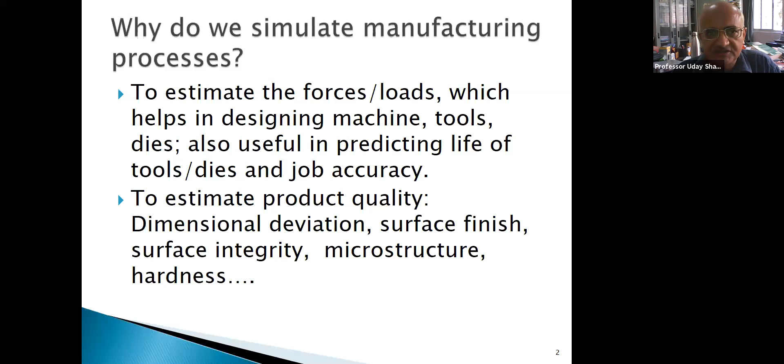Now, this is a common question people ask sometimes, maybe in many interviews also: what is the difference between simulation and modeling? So the definition of simulation, let us see what we actually mean by simulation. If we see the dictionary meaning, simulation is an approximate imitation of the process.

Here, this definition is not talking about whether it is a computer simulation. It may be by some machine also, like sometimes we simulate the actual experiments. If we want to simulate the situation of a flood, but we arrange that in a confined room, in a scale model, that is also simulation.

Another definition is that simulation is the imitative representation of the functioning of one system or process by means of the functioning of another. So if I am making, suppose there is a forging machine, and I take all its data and put it into the computer—naturally it was designed there—I can put all the things, and then whatever is happening on the actual machine, I can simulate on its digital avatar. That is also basically imitation.

That means one thing is being done in the computer, another thing is being done on the shop floor. And simulation, modeling, and analysis is the process of creating and experimenting with a computerized mathematical model of a physical system. So it is this definition which we will be following in this talk today—that invariably there will be a computer involved.

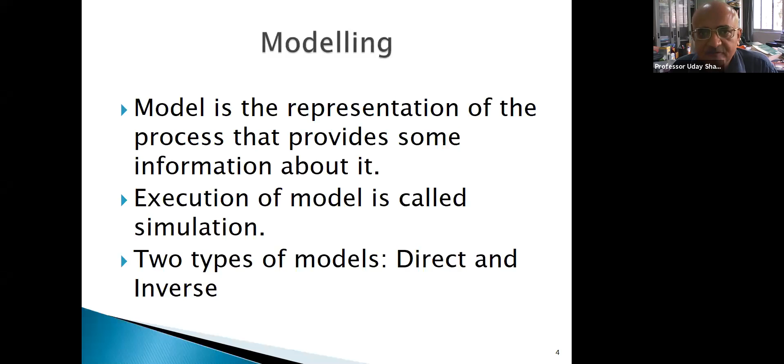Now let us start, since we are talking about modeling of manufacturing processes. What are the various types of processes? We have machining, which comes under the area of subtractive processes. Here we subtract the material.

Then metal forming, which is mass containing - neither we remove the material nor do we add it. Similarly, casting can also be called a mass-containing process. Here, in both these processes, we change something from one phase to another. In casting we change the solid thing to liquid and then we make the part; in metal forming we do not change it to liquid, but we make it into plastic form.

And then after that, powder metallurgy, then joining, welding, adhesive bonding, then 3D printing, which means additive process. So all these processes are there.

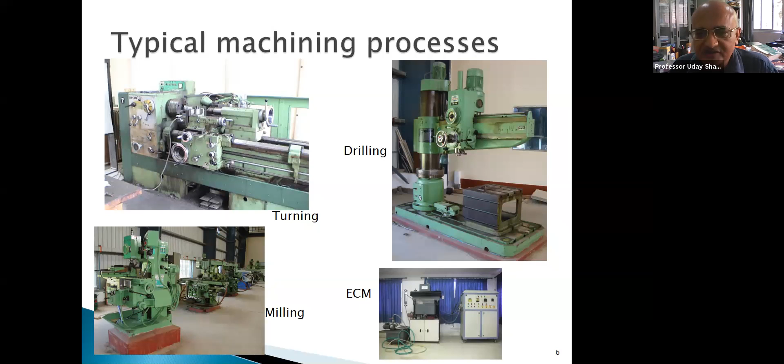Typical machining processes - you have many, like turning, which we do in our workshop. We have drilling, milling, electrochemical machining. Now electrochemical machining is covered in many books as a non-traditional process, but it has naturally become like a traditional manufacturing process - electrochemical machining, electro-discharge machining.

Typical metal forming processes: metal forming processes are those processes which cause a change in the shape of solid metal parts via plastic, permanent deformation. We divide it into two parts basically - bulk metal forming processes and sheet metal forming processes.

Of course we also have combinations, which are nowadays called bulk-sheet metal forming processes. In bulk metal forming processes, raw material and products have a relatively high ratio of volume to surface area. For example, rolling - surface area is somewhat less, but the volume is more.

Rolling was developed somehow in something like the 14th century, and was used on a commercial scale. And if we talk about extrusion, extrusion was developed by Joseph Bramah in 1797.

They were making lead pipes in those days. Now you know that we should not make lead pipes, because lead is a very harmful substance for human health, so lead pipes should be extinct. Still, in some places lead pipes may be there, but in earlier days even water supply was through lead pipes.

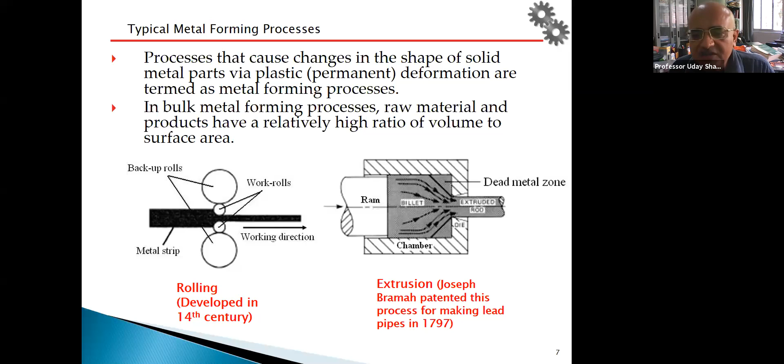So extrusion was used, and nowadays we can in fact extrude very high temperature materials also. Then forging - you have open die forging where it is upsetting, and then we have precision forging, closed die forging.

Forging was in fact in use even 10,000 years ago. In closed die forging, you compress it and it will be totally confined - material will be confined in the die, and some part of it will come out, which is called flash. It has to be trimmed. But nowadays, in precision forging, because of proper modeling, that flash can be minimized or almost eliminated.

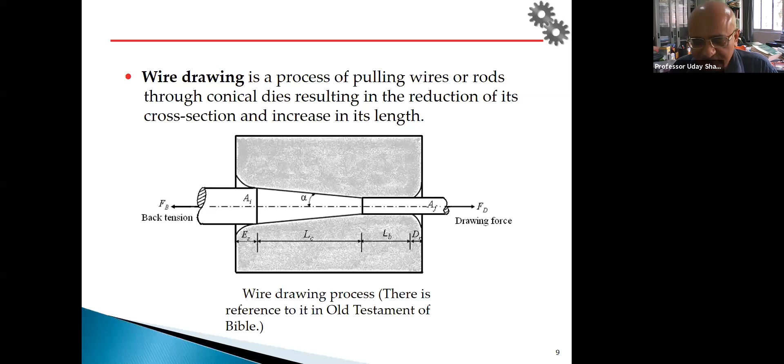Then you have wire drawing - it is just the pulling of wire or rod through conical dies, or any type of die, the profile of which may be of different type. In fact, there is reference to wire drawing even in the Old Testament of the Bible, so that means it is a very old process.

In sheet metal forming processes, raw materials and products have a relatively low ratio of volume to surface area. So here our primary purpose is not to change the thickness of the sheet, although the thickness of the sheet will also get automatically changed.

All these things will affect the quality of the product. If you apply very low amount of blank holder force, you may get wrinkling, and if you apply too much force, you will get tearing. So you can eliminate a lot of hit and trial experiments if you do proper modeling of this thing.

The raw material property also has effect. If the sheet has a lot of planar anisotropy, if the properties are different in different directions in a plane, you get one defect called earing. It's like a human ear you get on the sheet at the edges. These type of defects can be eliminated.

Now these are the traditional metal forming processes, but there are now emerging somewhat non-traditional metal forming processes also. Here in IIT Guwahati we have done such experiments, where we are deforming the material only by heating through a laser.

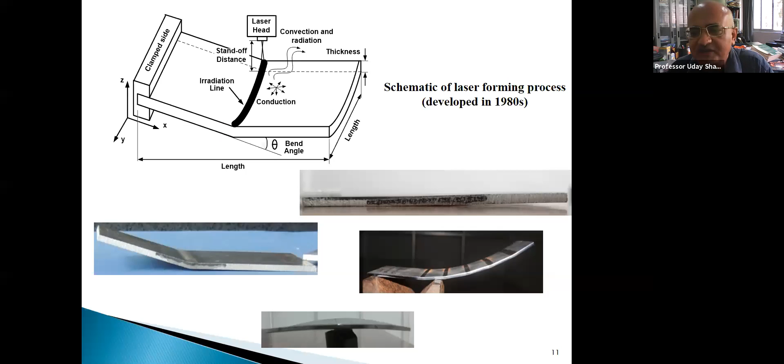And then I am making different types of shapes. I can make a cup, and this was just by heating - there is no contact at all. You can do that forming during, or after, the assembly also. In any inaccessible area, you cannot take your whole machine and die and punch, but you can take your laser torch only there, and it can be done.

So then we tried laser assisted bending. Assisted means that the primary process is not done by the laser. The laser is only heating and changing the properties locally, and bending is done mechanically here.

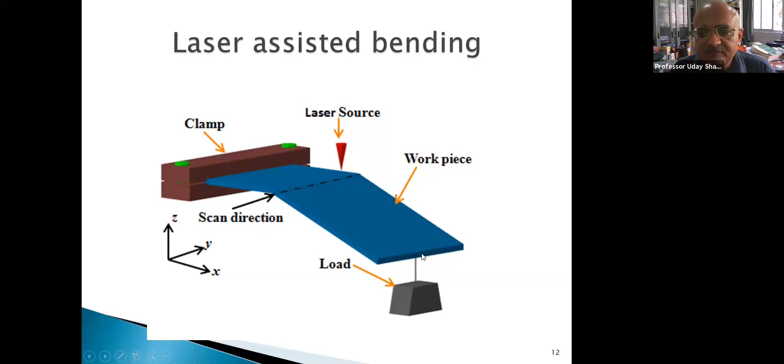Then there is laser origami. Origami is basically a Japanese word, meaning the art of paper folding - they make various things by paper. Laser origami means that if there is a sheet, I can make it into different forms, suitable for use, and then finally there is no need to cut and machine, and we can make complicated structures.

Apart from this, nowadays there is a trend that traditionally we have been thinking that metal forming is the process which will change raw material into a product form by means of plastic deformation. But another application of metal forming can be to improve the properties of the metal material.

Here I will not be changing the shape, just changing - suppose I will refine my grain structure. My grains will become ultra fine, even less than 1 micron in size, and due to that the properties will increase. Maybe its yield strength may increase by even 2 times, 3 times.

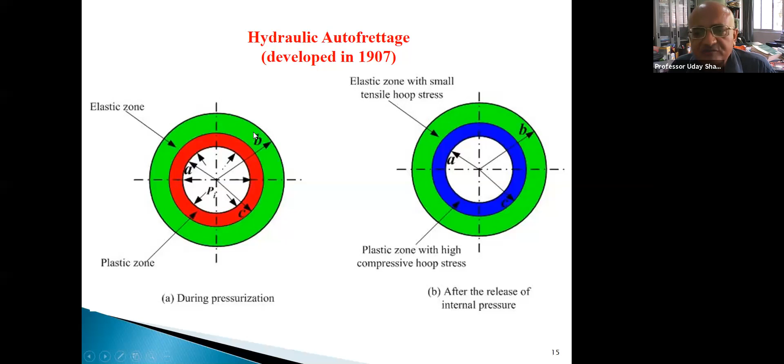So what happens is that hydraulic autofrettage produces compressive residual stresses inside, and outside we have got maybe some small amount of tensile residual stresses. So this type of process is also done.

We developed here, around 2014, extensive experiments on thermal autofrettage. Basically in thermal autofrettage, we are producing the same residual stresses by thermal means. This point has to be remembered: here the strengthening process is not due to strain hardening, but mainly due to residual stresses.

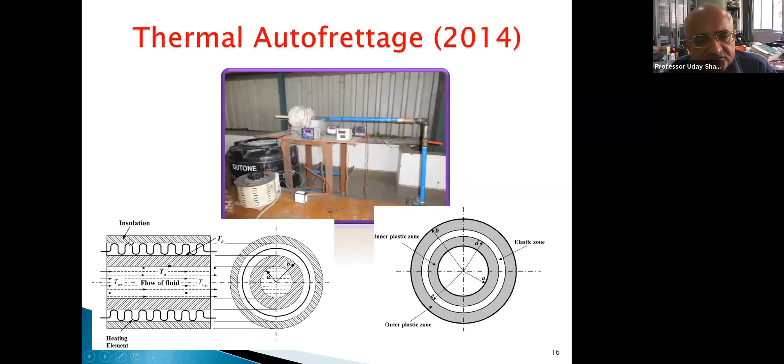Like we have even shot peening, where we inject a lot of balls on the surface just to induce compressive residual stresses. So what I am doing here is flowing water through the thick cylinder, and outside I am heating it, and then I am getting the residual stresses.

Recently I was telling my PhD student he should do some rotational autofrettage, but he could not do it in time, and after 2 years I saw this was done by someone, I think in UK — he did something about rotational autofrettage, where due to rotation of the cylinder we are producing the residual stresses. So these are the different types of processes.

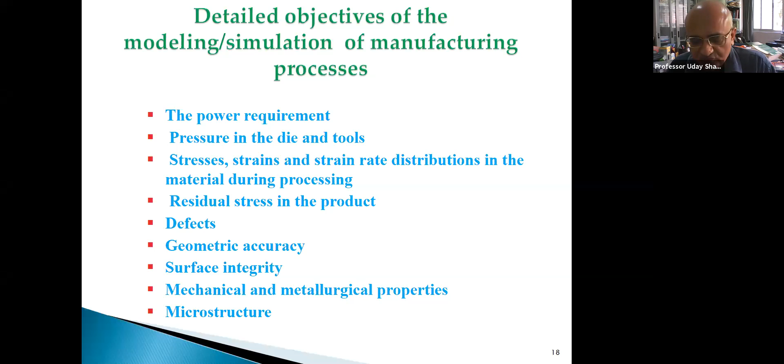So thermomechanical and microstructural modeling has to be done together. Now briefly I summarize these traditional techniques, because when we talk about modeling and simulation, suppose you want to make a good simulation package which can do these things — maybe it can be used for actual designing on the shop floor, or maybe as an educational package.

The idea is that it is not always necessary to use the finite element method. There are various methods which are very fast in predicting results, and in some cases, with some relaxation of assumptions, you can get accuracy as much as in the finite element method. Then why not use those methods, because they also give the physical feel, and they are computationally very fast. So we should not throw away those methods, although most of the time nowadays we are not using them.

One method is very old, called the SLAB method. It was used extensively in the 1920s, and after that it is contained in the traditional books. All the books on manufacturing science will contain these methods. For example, we take a slab of the material, do a force balance, develop equations, and solve them.

But this has been used even in recent times, like asymmetric rolling has been modeled using the SLAB method. Asymmetric rolling is an emerging process used not only for producing curved sheets and reducing load, but also for improving the microstructure.

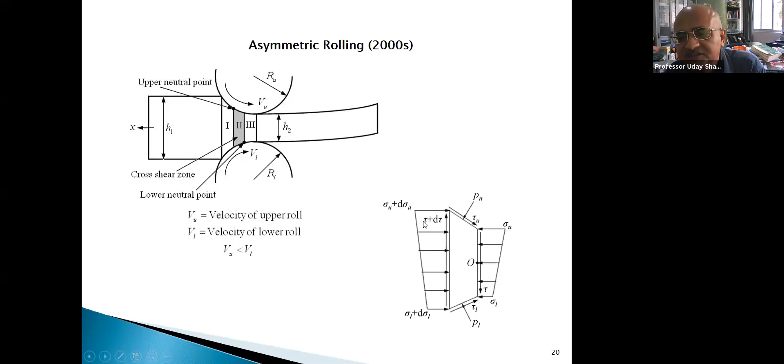So I assume that the stress distribution is linear here, like that. When you model this, you do force and moment balance, and you get three equations: sigma Fx equal to 0, Fy equal to 0, and sigma M0 equal to 0. These three differential equations can be solved simultaneously using any method for coupled ODEs - ordinary differential equations. You can even use the Runge-Kutta method, among many others.

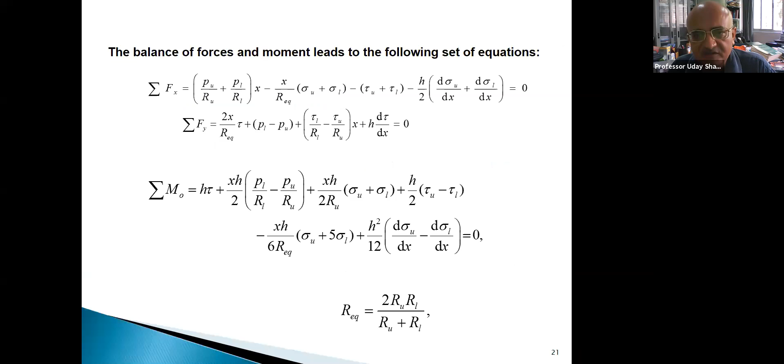So this type of thing is called the SLAB method, which is still being used. Another method was very popular once upon a time, called the slip line method, because it relied a lot on physical intuition. In most ductile materials, it is believed that deformation takes place due to slippage.

Even dislocations are there, but dislocations slip. So we assume that wherever there is maximum shear stress along a direction, there is slippage. But this method is usually applicable for plane strain problems, although researchers have tried to use it for axisymmetric problems too, with some assumptions and limitations.

In essence, the slip line method is basically solving these types of equations. You have to satisfy some yield criteria, although numerically, with the help of computers, it is also possible to take strain hardening into account. But most traditional slip line solutions are for rigid plastic material - they don't assume any strain hardening. So we can use either the Tresca criteria or the von Mises criteria, and we have to write the equilibrium equations.

It is essential that in most metal forming processes, if we achieve deformation through mechanical loading, we must always satisfy these equations. They are basically Newton's or Euler's laws of motion. I am not talking about the inertia term here, so you won't see it, but we do the force balance and get the equilibrium equations.

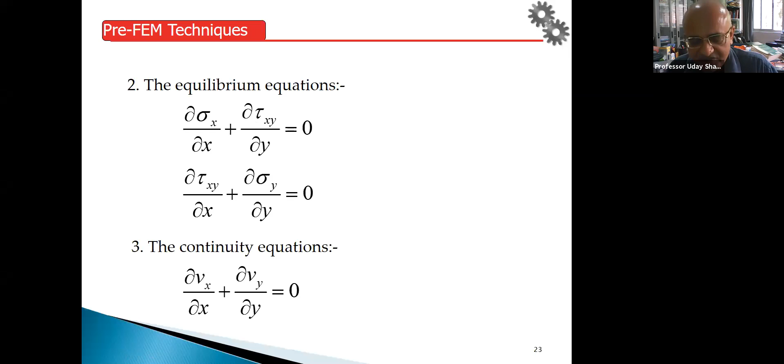Then continuity equations - since it is basically a mass conservation, and I assume the volume is also not changing, I get the continuity equation. When we use the slip line solution, we also assume that the principal directions for stress and strain rate will be the same - wherever there is a maximum principal stress, in the same direction there will be maximum principal strain, because most materials follow this procedure. But this may fail in newer types of materials, so you have to be alert about that.

So naturally we have got 5 equations and we have got 5 unknowns: sigma x, sigma y, tau x y, and Vx, Vy, velocity components. This one can be done analytically, but slip line is invariably a graphical type of method.

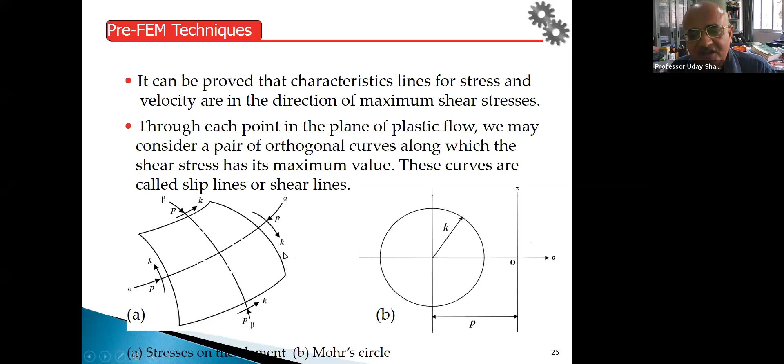Same thing we are solving by means of the slip line, and we say this is one slip line, alpha line, other is beta line, and on each plane on the slip line there is a pressure acting, and there is a shear stress, that is K. That K is the yield stress of the material. We can draw the Mohr circle and we can do that.

Then the equations we use are all based on equilibrium equations. We have some equations, that is Hencky's equation: P plus 2K phi is equal to constant along the alpha line, P minus 2K phi is constant along the beta line. That means if the slip line is turning, then the pressure will be changing, and similarly we can find out the velocity.

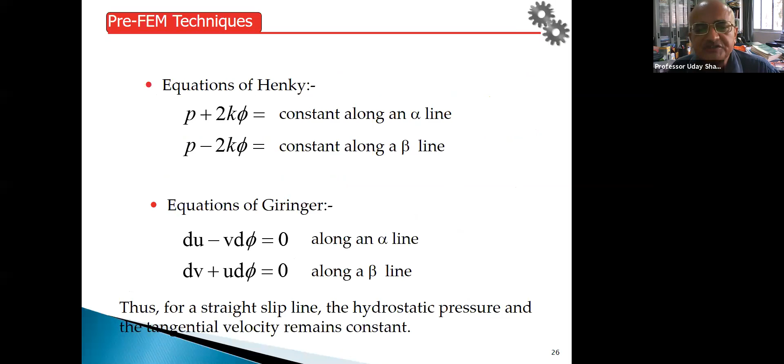So typically, say for example, you are doing the punch problem, you can construct the slip line. Now the slip lines can be constructed in a heuristic way, or they can be constructed in an analytical way.

Say for example, we can say that in this plane there is no vertical stress, so therefore this must be one principal plane, and therefore the shear stress should be at 45 degrees. Like these type of logics you can put, and you can actually construct the slip line field for the indentation of, suppose, a semi-infinite medium by a punch, and then you do the analysis and you can get that the punch load will be 2K times 1 plus pi by 2.

So then they have been used, in fact, in machining also. In machining they used, suppose this is a chip and this shearing is taking place, they assume that this is the plastic zone and this maximum shear is along this direction, so it must be a slip line. And 90 degrees to it will also be a slip line. So based on that, they obtain these type of expressions.

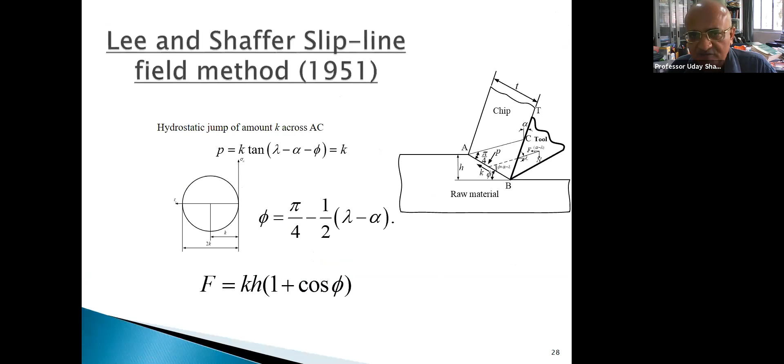This was done in something like the 50s and 60s. But even now, there are some papers. Say, for example, this is a good journal, International Journal of Mechanical Sciences. This paper has been published recently in 2017, Theoretical Prediction of Machining Induced Residual Stresses in Three-Dimensional Oblique Milling Processes.

In this work, stresses in the bound zone are evaluated using slip line field. So that means, although these techniques are very old, and nowadays in favor of FEM those techniques have become almost extinct, even then you can make use of that. So it is worth paying some attention to that.

Similarly, there is a technique which is extensively discussed in Hill's book in 1950. This is called the upper bound method. This gives a very quick estimate, and this can be a very handy practical method. This method calculates the greatest possible load that a metal forming process can deliver or sustain.

In this process, what happens is suppose you are doing metal forming, you assume a hypothetical velocity field, that your process can be going this way. It may not be the real flow, but based on that you find out the stresses, etc. And then you develop that, if there are some discontinuities, at that point you say that power is due to shear discontinuity, you consider the friction effect also. With all these you calculate the power, that means hypothetical power.

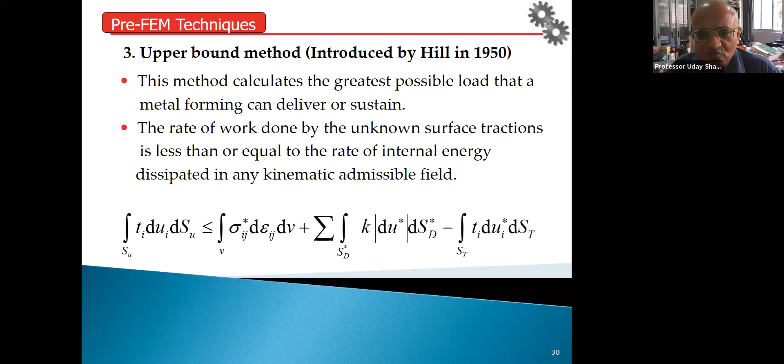So this hypothetical power which you have got, it will always be more than the actual power. Maybe the intuitive understanding will be like this, because most natural systems actually try to minimize power consumption. So that is why the upper bound method becomes very handy, that you just have to assume a suitable velocity field and you can do that.

Similar to the upper bound method, in fact, the lower bound method is also there. In this, you don't assume any velocity field, but you assume a type of stress field. So in this, what happens is that when the body is yielding and you consider that plastic deformation is taking place, based on the hypothetical stress field, you calculate the power, etc. Then what will happen is that this power will be less than the actual power.

So if you do both upper bound and lower bound analysis, you can get an estimate of that. But these techniques, of course, have many limitations, because here you are talking about only finding out the power, but you are interested in finding out many other things.

This can be used even for finding defects. The procedure is like that: they make one sound product and assume that this is the velocity field. Then they assume what the velocity field would be in a defective product. If the defective field gives less power, that means deformation is likely to take place that way and a defect will be formed. So these type of things have been done.

Long back, this procedure was also very much used, that is the visioplasticity method. Visioplasticity means visual examination. So we make a grid type of thing. Even now, when we do forming limit diagrams etc. on the sheet, we make some grids, and after that we see the deformation.

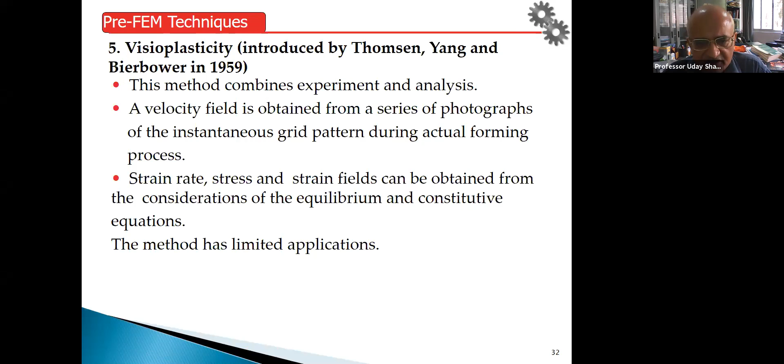During the deformation, we can keep some high-speed camera and take photographs. So I can see visually how the deformation is taking place, and then find out the strain rate, stresses and strain field, and then do the analysis. This method has, but nowadays, limited applications. With the advent of FEM, all these techniques have lost importance.

FEM was used for modeling of metal forming processes since about the 1970s. Typically, the finite element method is basically a numerical method of solving differential equations.

So basically, you have continuity equations in 3 dimensions, then equilibrium equations. I have used index notation. If you read new papers nowadays, they will invariably use index notation and even Einstein summation convention, but I am not going to detail about that. These are equilibrium equations, then strain rate velocity relations, strain displacement relations, and constitutive relations. All these things we do.

There are 2 approaches to do finite element analysis, 2 main approaches, and using different combinations of these 2, we have hybrid approaches also. One is the Lagrangian formulation, in which we focus on each and every particle as the deformation is taking place, how it is going. It is a type of control mass approach. The other approach is the Eulerian approach, also called flow formulation.

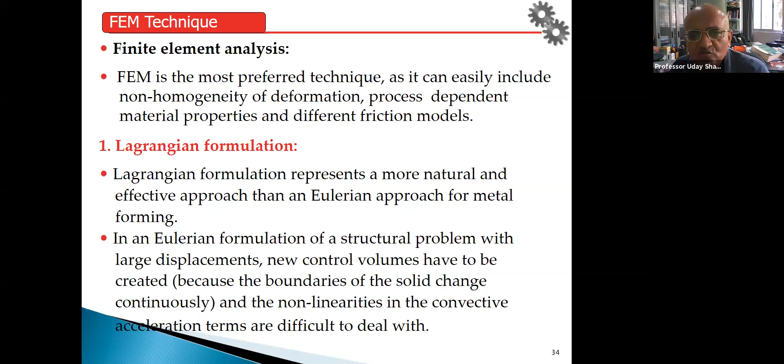It is something like water is flowing through a pipe and I am only seeing the pipe. So at any instant of time, there will be some particle, but after some time, another particle will come, and this process goes on. So these 2 formulations are used and they have got pros and cons.

In the updated Lagrangian formulation, at time t equal to 0, if a particular particle is at p, then it goes to p dash at t equal to tau, and after that it is going at tau plus delta t. So you have got a particle path, like that you have the particle path for all the particles, and the computer can keep tracking this.

In the finite element method, there may be some discrete particles, that means there may be some nodes, and the computer is basically tracking those nodes, and in between it will do interpolation. So these type of things are there.

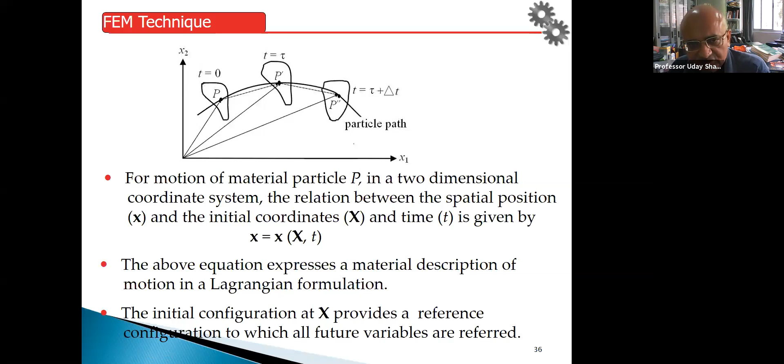Reference configuration is this. This is called total Lagrangian formulation, but you can also do it increment-wise, where when you are talking about this position, you only take the reference as the previous position. That will be called updated Lagrangian formulation. So in modern day finite element packages, these terms are used, updated Lagrangian formulation or Eulerian formulation. You should be familiar with that.

So updated Lagrangian formulation is that type of formulation. Suppose there is a car, now this car is going on the road, you follow where it is going. This auto is going in a different direction, you have to follow it also. And your truck is going a different way, like that, wherever they are going.

So your mesh will naturally keep distorting, because initially something was straight, after that its curvature has changed, it has become curved, so your mesh also has to change. All these type of difficulties are there. It takes a lot of computational time. That is the only drawback of this one.

In fact, I would tell you that our typical idea, when we did finite element simulation of laser bending etc., one simulation was taking about 7 to 8 hours. So you have to do something about it. Difficulties are more computational time, and sometimes residual stresses are not predicted properly due to accumulation of computational errors. You have to worry about that also. It is easier said than done.

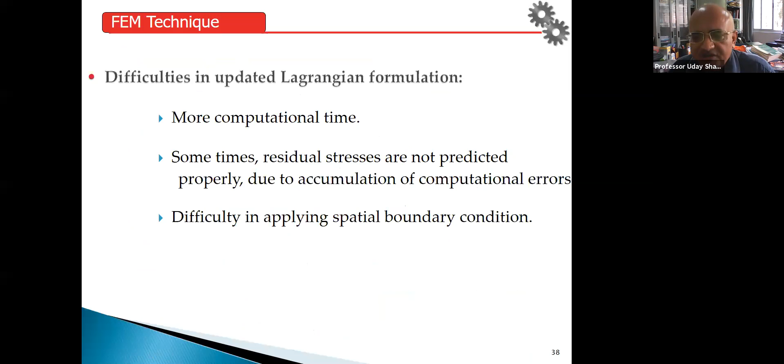A lot of difficulties are behind the screen, but finally you get a nice simulation. But difficulties are there, including difficulty in applying spatial boundary conditions.

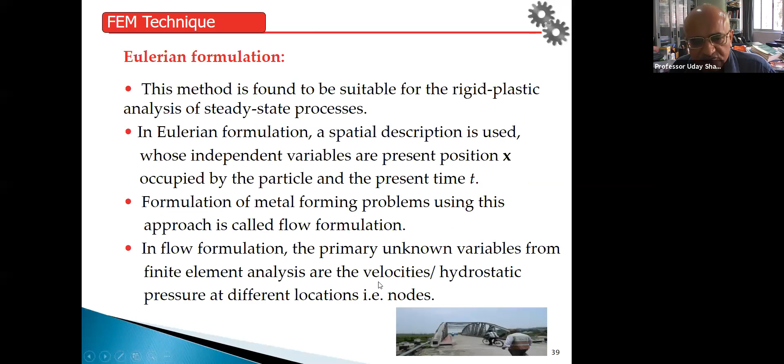Eulerian formulation is like this: suppose you have a bridge, you just stand on the bridge and see what is happening, who is passing through it. This type of formulation is also called flow formulation, and we find out velocities and hydrostatic stress.

So we talk in terms of the strain rate, and we have the Lévy-Mises plastic flow rule that relates the strain rate to deviatoric stress. And then we have a non-linear problem, like a flow problem, similar to solving the Navier-Stokes equation, but here it is non-linear, non-Newtonian flow.

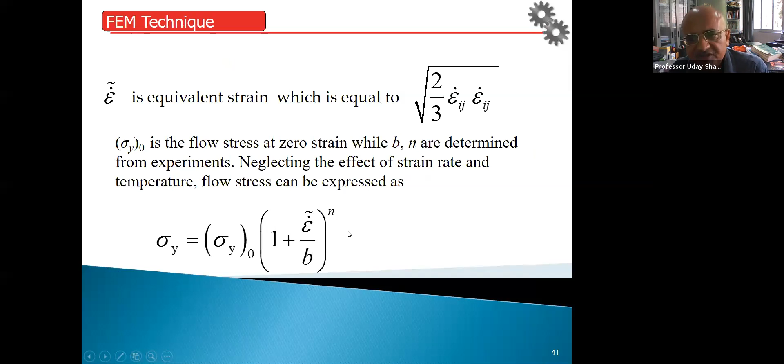Many researchers solve this using the Galerkin formulation, but sometimes there is some difficulty because in one equation there is a pressure term, and in the other equation there is not a pressure term.

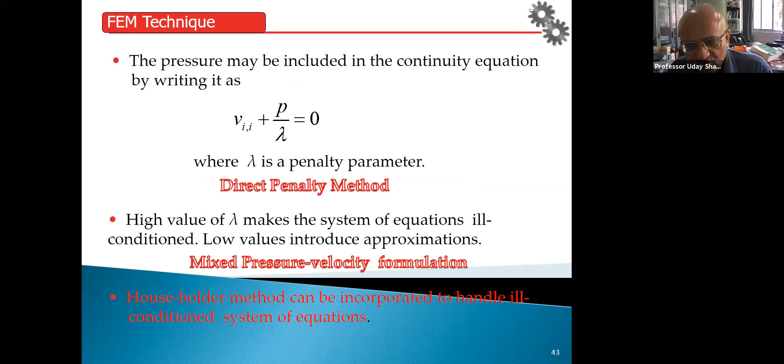So people use some penalty type of formulation. They say the continuity equation is this much plus P by lambda, hypothetically introducing a penalty, and lambda ideally should be infinity, but they take some finite value. Then there are mixed pressure-velocity formulations, but you get equations which are basically very ill-conditioned.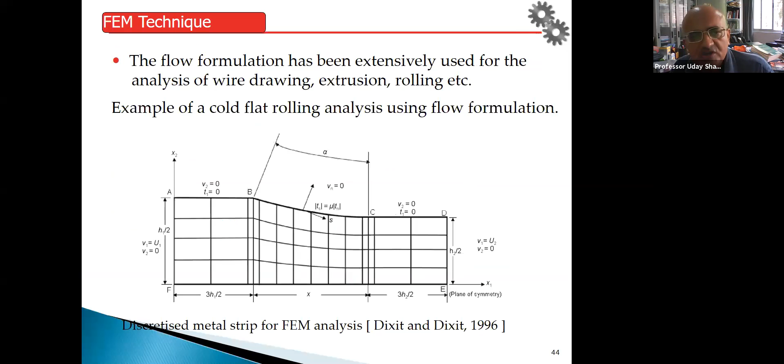So flow formulation has nevertheless been extensively used for wire drawing, extrusion, rolling, like a flat rolling problem. We have got the mesh, we are doing this, and then we get these type of equations.

Ultimately, at the end of the day, you only have to solve the simultaneous equations. So your accuracy is much dependent on how fast you can solve these simultaneous equations, meaning both accuracy and speed matter.

There are a lot of people who do research on what efficient method can be used for solving these simultaneous equations, because this matrix will contain a lot of zeros.

Sometimes you get a pressure, but we have noted that we get a spurious amount of pressure because there is no derivative of pressure involved in the equation. So you get some pressure times constant, and if epsilon dot ii is very, very small and this is very large, theoretically epsilon dot ii should be 0, lambda should be infinity, so infinity into 0 becomes indeterminate. So these types of problems are there.

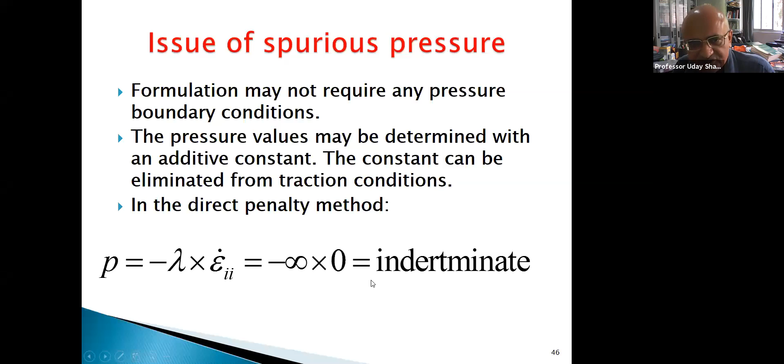So we computed pressure by some finite difference type of method, and after obtaining some solution, we again go back to solve the basic equations and try to reduce the error.

We also used a neural network here to ease our formulation problem, because once we have to take derivatives, if you take them by the finite element method, they will be very inaccurate. So you take this and then differentiate to get this one.

So what we did was, we saw that earlier we were getting results like this with the earlier model, shown as the dotted line, but now the results are coming very fine. That means they are matching well with the experiments.

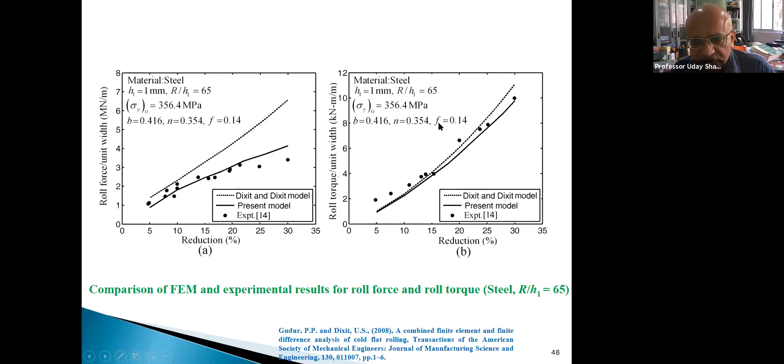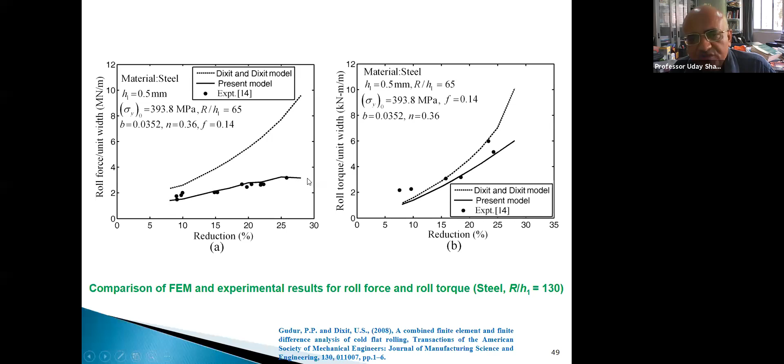Similarly, here the results for the roll torque are also shown, and there is a lot of improvement. Earlier you were getting results like this even by finite element, and other researchers were also getting similar results, but now we improved and are getting more accurate results.

The same improvement happens with other materials too. We have to test it on different materials because the properties will be different.

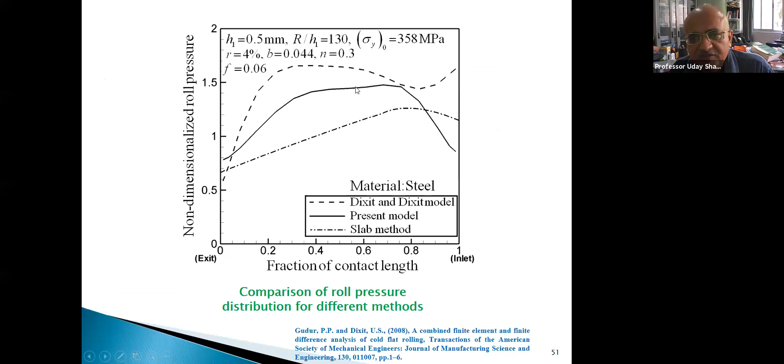We also tested the pressure distribution. If we find the pressure distribution by our original model and this model, and then by the slab method, we see that the results become somewhat different.

So some points regarding estimation of secondary quantities. The finite element method usually gives the nodal values, and after that you find the stresses and temperatures, etc. There are a lot of final issues which can affect the accuracy.

Suppose you have to find the load, let's say the forging load. You are doing the forging, you got the velocity field, you can find the strain rate, and after that you can find the stresses. Now if you integrate those stresses, you can find the force.

You integrate the stresses on the surface. The other way is that you can find out the total power dissipated, and then once the power is known, power divided by velocity, because the punch is giving all the power, it is compressing, all that upper die is coming and compressing the forging material, and it is coming like this.

So you can find out the forces by means of the integration of stresses, and also you can find out by energy balance. Now which approach will give good result?

It is noted that the energy balance approach will give correct result, because in one you are dependent only on these surface stresses, and if there is error in the surface stresses, you will get huge amount of error, whereas in the other you are dependent on the whole bulk of the material, and moreover when you integrate something, the errors get reduced, and when you differentiate, errors accumulate.

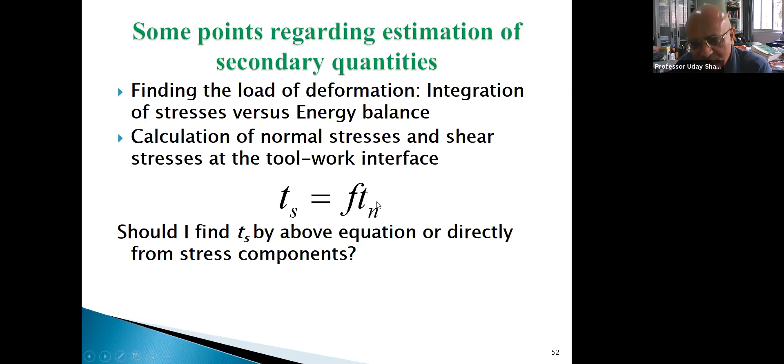Again, there are fine points here, because shear stress is a small quantity compared to normal stress. So a small amount of error in shear stress will have a huge percentage error effect. On the other hand, if you find it based on the normal stress, the error may be less.

At that time the researcher concluded that maybe there is some effect, and that there should be an optimum amount of friction, otherwise if you increase the friction, the torque would behave differently. But this is counterintuitive, and later precise analysis depicted that this happened due to numerical problems.

So numerical aspects can be very important. Now let us talk about that. Suppose by doing the finite element analysis, other than roll force, roll torque, etc., or in wire drawing, if you find drawing force, other than that, what it can tell - finite element method can give some extra information.

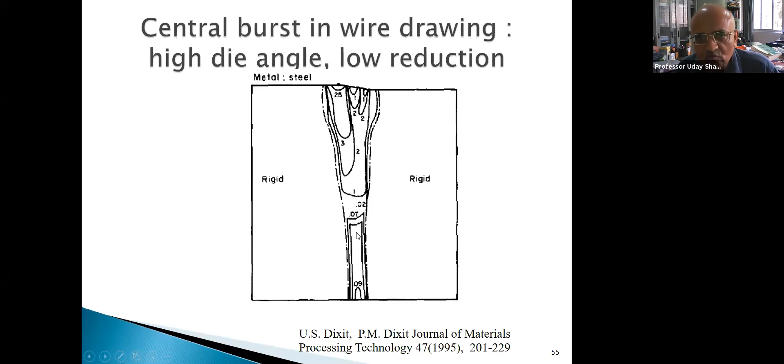Similarly, if you do the temper rolling process, in temper rolling we do very little reduction. The purpose is only to reduce the softness of the material - you just want to make it hard, and you want to impart good surface finish. So in that process also we observe that there is some elastic zone in between, which may create problems.

When you are modeling these processes, you have to model friction very properly. Friction will have a huge impact, particularly in microforming processes, because as you have attended a talk by Professor Amitava Ghosh about scaling laws, if you reduce the size, your surface area becomes large compared to the volume. So whatever happens at the surface may become very important, which was not important at the macro level. Friction is one such effect, a surface effect, so it has to be modeled very carefully.

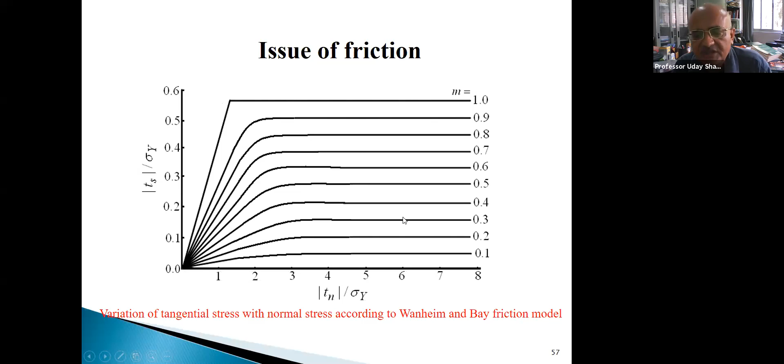It has been observed that Wanheim and Bay in the 70s gave this type of model: if you have a low amount of normal pressure, friction behaves like a Coulomb's coefficient of friction, but after that it becomes like a constant shear, and in between there is a transition zone. These types of behaviors were analyzed using the slip line solution.

Similarly, we have done a lot of experiments recently on rolling, and we saw the effect of temperature on friction in metal forming, which is controversial. If you see different publications, you may get different results. Somebody will say that with temperature the friction coefficient increases, and some will say it decreases. Why do they have different results? Because friction is not dependent on just one thing.

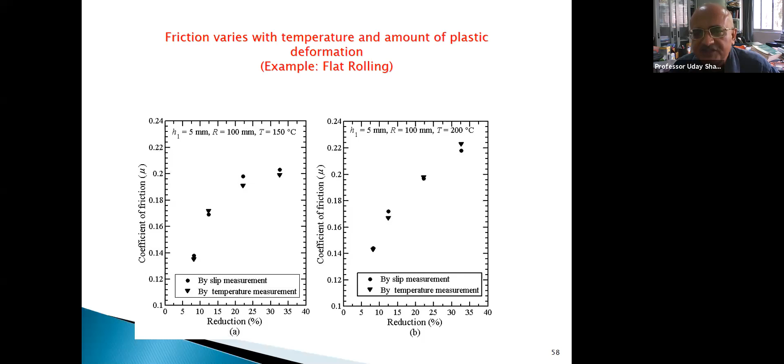Friction is actually dependent on many things. Sometimes if you take virgin material, the frictional phenomena may be quite different, but you know there is oxide formation, and a film gets deposited, which changes the scenario. So friction is a very complicated subject, but it is worth studying.

I am nowadays doing a project with a Russian professor on this aspect only. There are many things involved: thermal aspects like tool temperature and workpiece temperature; material aspects like surface topography, flow stress, grain size; chemical aspects; tool geometry, spring back, tooling aspects. Even whether you are giving ultrasonic assisted vibration - its effect has been reported in different ways in different publications.

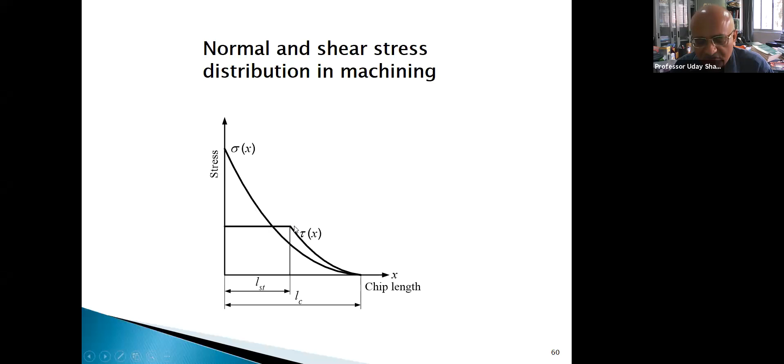So there are many issues with friction. Even in machining, suppose this is the typical stress distribution in the tool, the friction may have two zones - one is the sticking zone, the other is the sliding zone.

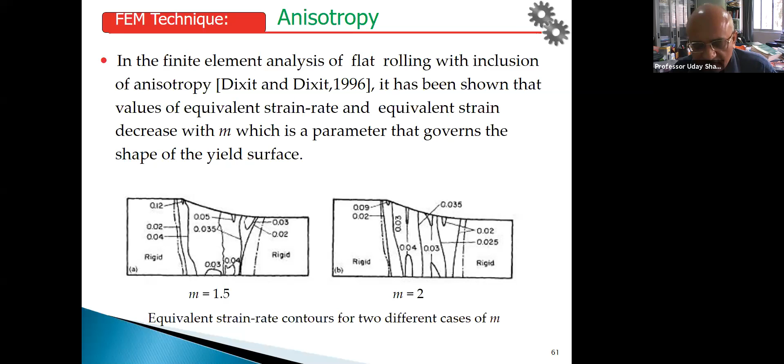Then there is the effect of anisotropy, which will also change the behavior - anisotropy is a very important parameter. In sheet metal, we define planar anisotropy, where properties are different in different directions in the same plane, and normal anisotropy, where the property in the plane is different than in the thickness direction. So in deep drawing processes, sometimes we require normal anisotropy, but we do not require planar anisotropy.

Finding out the residual stresses in metal forming, etc., is very challenging, and we have tried to do this. Nowadays many packages, I have noted, sometimes give incorrect results, so you have to be very careful in using these packages.

In fact, there are standard packages like Deform, and many people have modeled in Abaqus. Many researchers have reported results, but only those results which were very convenient. Even my student was doing this type of thing. I said, stop doing this. We will not publish these type of results, because very nice things came for cutting force prediction, but then I asked, what about the thrust force? In the thrust force, there was a huge amount of error. Then he showed me some previous papers - they also, in a very clever way, did not publish results on thrust force, etc. So what I am telling you is that in simulation there are a lot of issues, and whenever you use these packages, be careful, see it from all angles, and only then use it.

Now thermal modeling is also a part of that. Suppose you have to do warm roll flat rolling, and in that you can have a deformation module and a thermal module. It can be done in sequential way, meaning first you find out the deformation, then take that data and obtain the temperature, and you can keep repeating this process. Or you solve both phenomena together and have a coupled model, with constitutive equation, friction model, and then predict strip temperature, slip, and all those type of things.

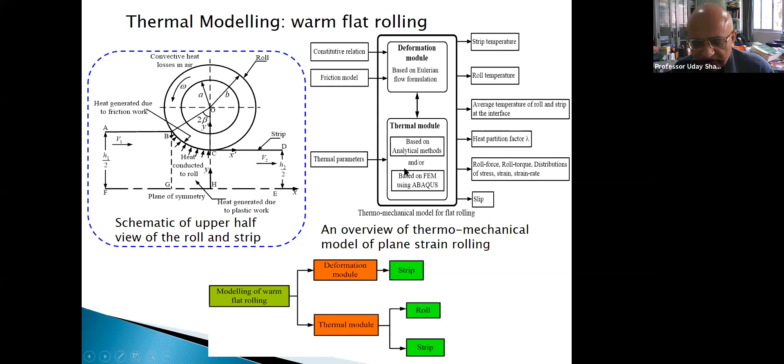Then using proper material modeling becomes very important. Nowadays you can make use of big data to get the proper model. You need not give any empirical model nowadays, because the computer can take the raw data and by means of database modeling, it can immediately make use of those values. But earlier, when computers were not so powerful, people used to take a lot of data and try to fit a type of model, and that is why so many models came.

Like the Hollomon law, you know very well, you keep using K, epsilon, n. What will happen is you get less error at one place but more error at another place. So maybe nowadays in computer, you need not do one single equation. You can use, suppose, maybe 50 equations in that given domain, because in each zone the material behavior is different. I am just highlighting that there are a lot of models.

In some models, temperature effect is also coming, and in some models, there is an effect of strain rate coming. Some is power law type of model. This very popular Johnson-Cook type of model is widely used in machining, where strain and strain rate are usually taken as plastic.

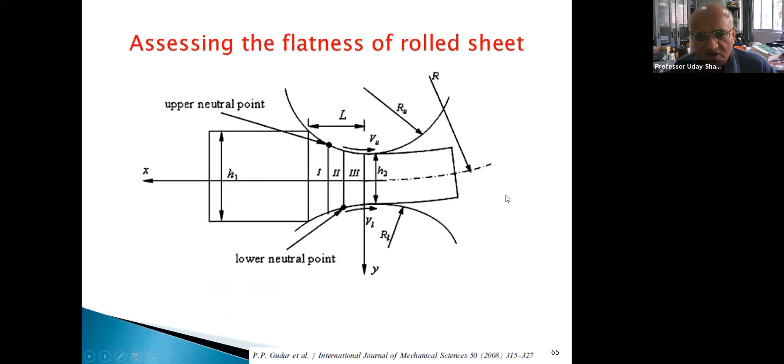And then by modeling, you can also find out the quality of the product, suppose flatness of rolled sheets. So this is what can be done, predicting the curvature, etc. This type of thing we have done using the strip method, and then compared it with FEM.

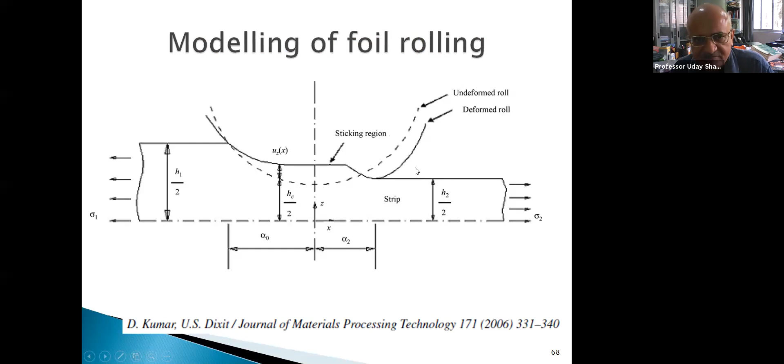Modeling of foil rolling produces additional challenges. Very thin, ultra thin sheets are there, so its modeling cannot be the same way as traditional modeling. A lot of elastic zone is there, a lot of effect of elastic deformation is there, and there will be a sticking region -- all these type of things are there. And as I talked about inverse modeling, sometimes you can find out the parameters in an inverse manner.

After that, we verified experimentally -- we predicted the flow stress by the inverse method and compared it with the experimental results.

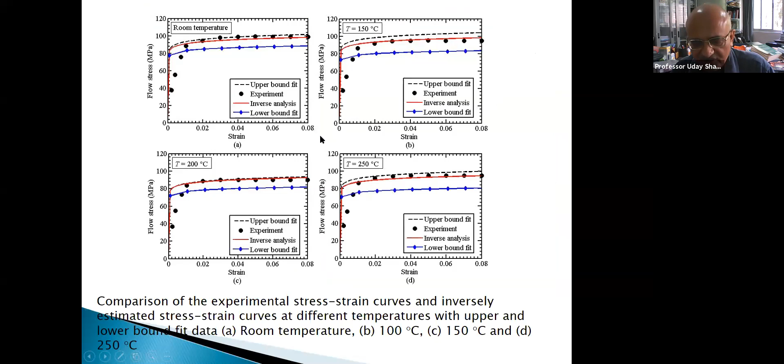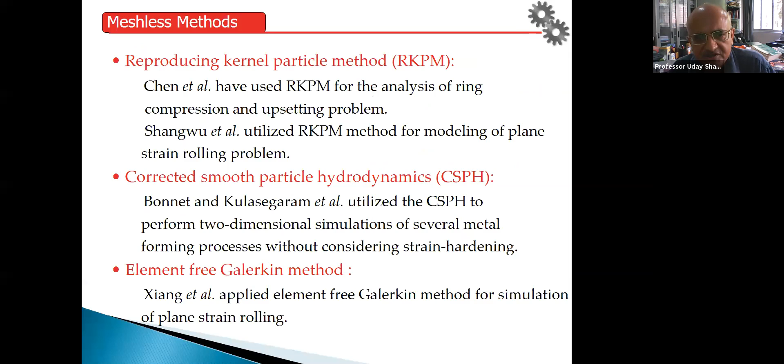Since 2000, after one book was written by a researcher, Liu, called Moving Beyond FEM -- meshless methods, in 2000 -- they developed meshless methods because mesh distortion and other difficulties are there. So a lot of meshless methods were developed. I'll just tell their names: reproducing kernel particle method, corrected smooth particle hydrodynamics, element-free Galerkin method, radial basis function collocation method. My students also have used some of these methods, where you have some nodes and no mesh, and you study the typical contours and the deformation.

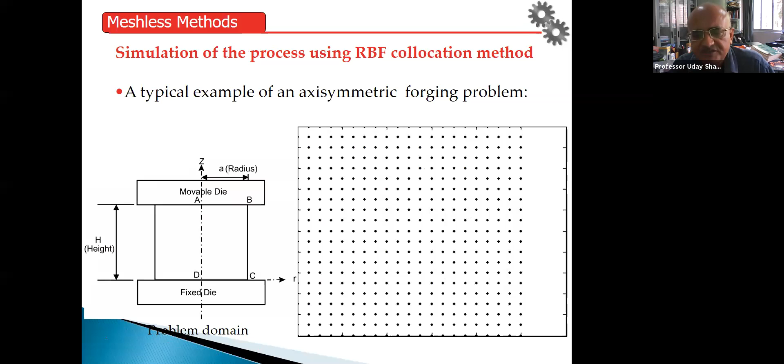But what I must tell is that these methods take a lot of time, and there are a lot of practical issues. They may look very attractive, but there are a lot of challenges. So even after 2000, now in 2020, after 20 years, the meshless method could not outperform FEM, because they are computationally very time consuming and there are some numerical errors associated with them.

So nowadays, one thing that can be done easily, and people have started this trend, is increasing computational efficiency through hybrid methods. For example, in early 2000, I wrote a paper on a neural network assisted FEM model. My scheme was that you do a lot of FEM modeling and get the velocity field and location of the neutral point, and then you can train a neural network.

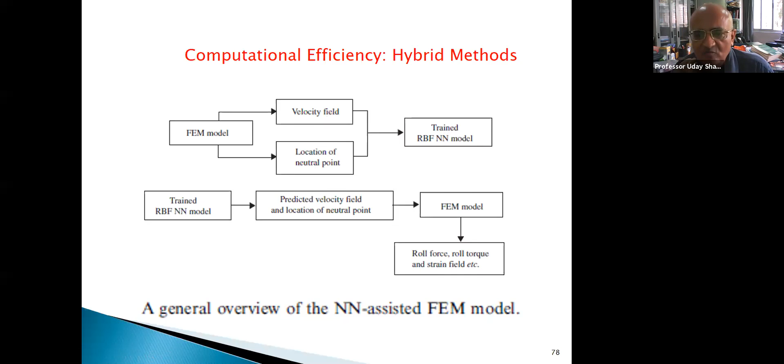Then this trained neural network can anytime predict the velocity field and location of the neutral point, and FEM can be used only for fine tuning the result. So mostly the job is done by the neural network, and this will take very less amount of time. So this type of hybrid approach can be adopted. Similarly, some AI-based methodology can be implemented.

On the shop floor also, artificial intelligence-based methods can be used. Suppose I have to operate something, and let us say I have one parameter, which may be speed, for example tool speed or speed of the laser head moving - I am just giving an example. So I have taken only one parameter in the block diagram. Suppose I guess the speed and put it in an FEM module, but I get results which may not be as per expectation. So I optimize it - that means I do this process again and again.

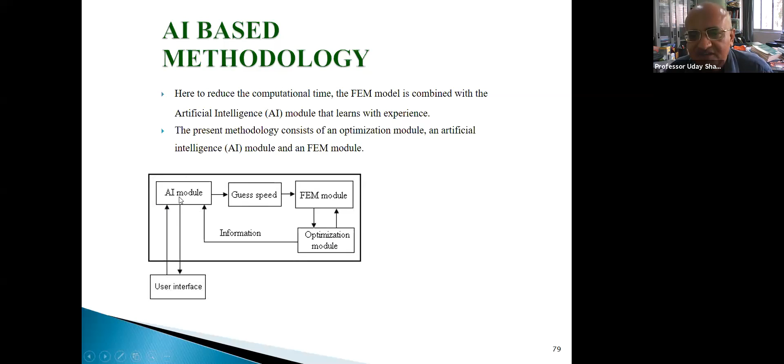In optimization, you have to do a lot of simulations, but you don't throw away those results. Those simulated data, if stored in some place, will make a good data bank. Once the good data bank is formed, your AI module becomes intelligent and starts learning again and again. This process can be applied - that is the essence of it. I used it even in laser-based forming and in machining. Many places I have used it, and my students find this approach very effective.

Suppose one simulation was taking 6 hours, and in the beginning, if I wanted to guess something - that I need this precise angle, what should be my parameters - I had to do 7 trials. So it took total 42 hours.

But now, after I did 8 different jobs, different types of jobs, sometimes it took 8 hours, then 6 hours. Gradually, with a lot of database, prediction takes only one simulation, because that information is already contained. This means that optimization, unlike FEM which is a very neat and clean method, gives that result - if I do FEM and you do FEM properly, you and I are expected to get almost the same result. And if we are using the same machine, we will be getting almost the same time also.

But optimization is very risky sometimes. That's why when people compare optimization algorithms, saying GA is better than simulated annealing and so on, I am very skeptical about that. Why? Because in optimization, a very important thing is that you have to take one guess value, and the moment you change the guess value, your results may change. If your guess value is close to the solution, you may take only 5 iterations, but if the guess value is vague, it may take more. So if we already know the proper guess value, my time gets reduced.

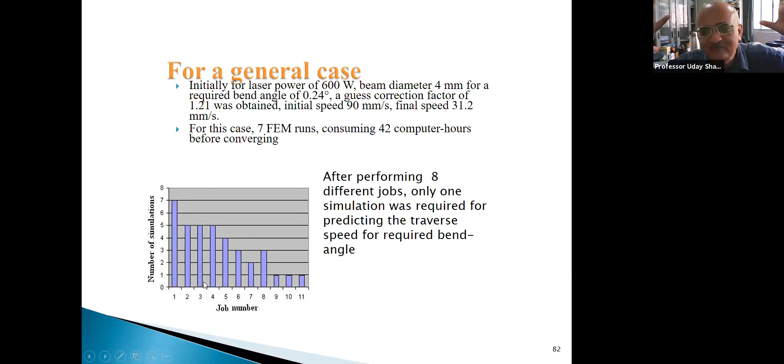This can be done by means of data-based modeling, by making an artificial intelligence module. There can be several ways of doing that - you can make an expert system. In the beginning, it was taking 7 iterations, and even students used to face difficulty, so I had to run it myself before they could do experiments. After that, when we kept the database, that information became a guiding tool for them, and it took fewer iterations. So it is a simple concept, but it takes this approach.

Now, finally, coming to the microstructural modules, because microstructural modeling has become very essential nowadays - you should model the material behavior. Nowadays I am doubting, particularly in micro forming, micro machining etc., whether the Tresca and Von Mises models are applicable in many materials. In fact, the Von Mises model has been used extensively in metal forming, but this may not be applicable at all.

Suppose you are doing magnesium, for example - it has got a hexagonal close-packed structure. Aluminium has got FCC structure. So the behavior of deformation is totally different. In FCC, slipping is dominant, and in hexagonal close-packed structures, twinning deformation may become prominent. So micro models naturally also have to change.

In earlier days, mechanical engineers were not bothering at all about microstructural aspects, and they used to model believing that everything is correct. In fact, I have seen in the 90s a lot of research was done - even in IIT Kanpur, people were doing die optimization. So what is the objective function? They say we want to minimize the power.

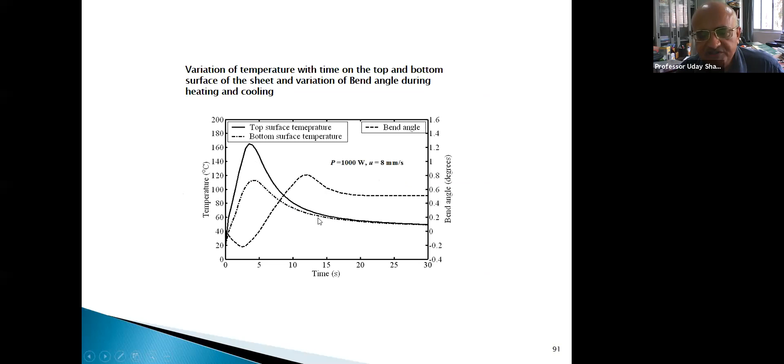We get a lot of clues here, but we also use kinetics of diffusion-based transformation, and typically there's one classical equation called the JMAK equation, Johnson-Mehl-Avrami-Kolmogorov, which says that phase transformation, or even grain refinement, may take place following this type of law.

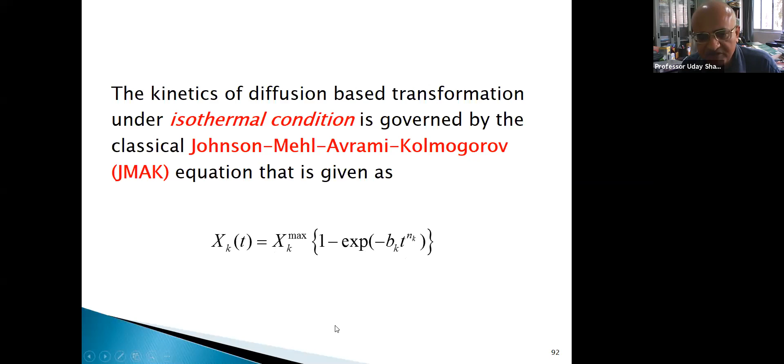Here, b and n are of course constants that have to be determined empirically or from given experimental data. So basically, you have to write a subroutine. There will be a mechanical module which finds the stresses, etc., which feeds input to the thermal module, and then there will be a metallurgical module.

The metallurgical module will do calculations, including latent heat information. Phase transformation information will come from temperature, giving an idea about phase transformation, and when there is a phase transformation, latent heat is also generated, which feeds back in. So there is always interaction. Suppose metallurgical transformation is taking place, there is grain growth, and it may produce some plasticity. So these types of things are there.

So you have to understand a particular material. It's very difficult to develop one model for all materials, because metallurgical effect cannot be modeled that way. Mechanical and thermal behavior is all right, more or less the laws of heat transfer are valid even for aluminum as well as steel, but metallurgical behavior will be drastically different. We modeled some hardness distribution in laser irradiated sheets, heating the sheets and then observing that after bending, what the hardness is.

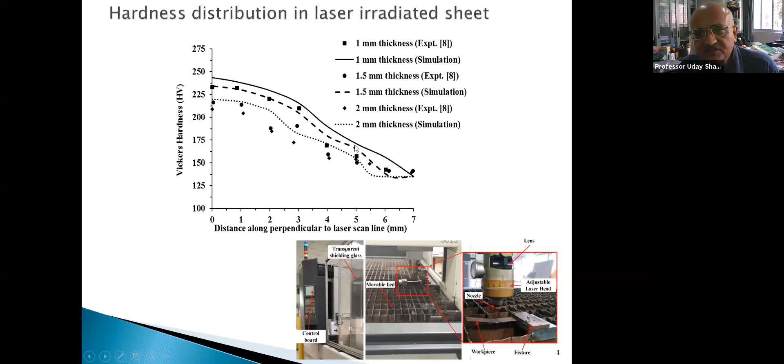We got very good prediction by metallurgical modeling. You can see our experimental data compared with the simulation, and the graph shows there is matching. We also predicted the phase fraction, telling how much percentage is bainite, how much percentage is ferrite, and all those types of things.

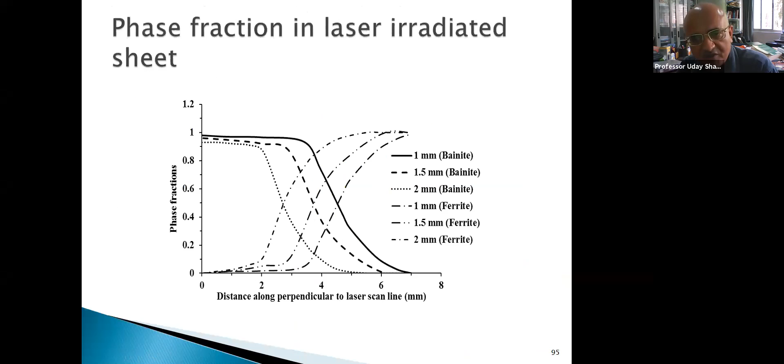So all these things can be done even in machining also. You can do the microstructural modeling, and it is like this one.

Let us summarize machining. Machining research is in fact not as matured as metal forming, because modeling of machining is more challenging. People have rather given up, thinking only up to this much can be done. In the 1940s, Merchant's analysis was respected only because it was probably the first analysis to use trigonometry, mathematics, and algebra, but otherwise it is not important at all.

Then in the 1950s came slip-line field solutions, analytical models. In the 1970s, they started using finite element methods. I am claiming that even now, finite element methods are not giving satisfactory answers, and they are taking too much computational time.

When they model the machining process, even though the actual thickness is more, they have to take thickness of 1 mm. They have to do machining maybe for 10 seconds, and even that 10-second machining may take a lot of computational time.

Because of this type of problem, mechanistic models developed and soft computing got very much importance. People started focusing attention, saying by neural network I can predict surface roughness and all these things. This clearly demonstrates that there is still a limitation in the FEM model, otherwise these techniques would not have emerged.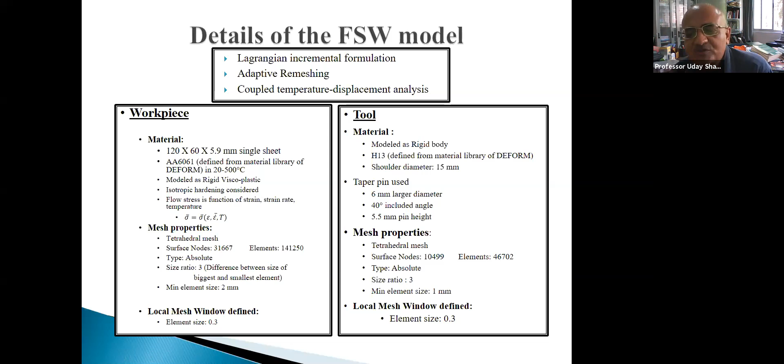Nowadays my student is doing friction stir welding modeling in DEFORM using Lagrangian formulation, adaptive remeshing, and coupled temperature displacement analysis. He has mentioned that properties, element size, and material all have to be taken very carefully. If he takes the tool as a rigid body, he is able to reduce the time; otherwise, if you do very realistic simulation without any assumptions, naturally the time will be enormous.

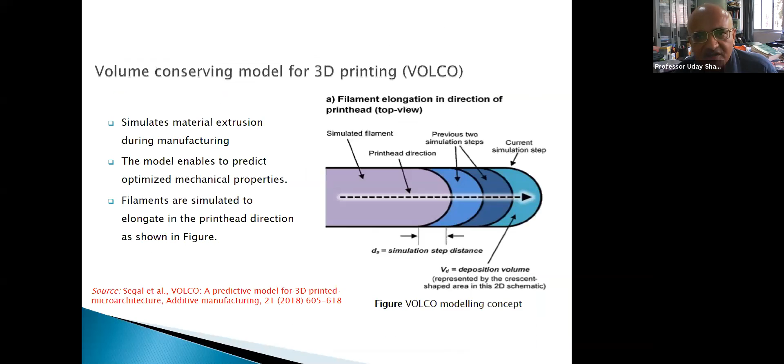After doing that, we run some simulations and get some parameters. He has given me some simulations which I may play later, showing results of deformation and process parameters. Quickly I will also mention that 3D printing simulations are becoming very popular, and this is a volume conserving model of 3D printing from Loughborough University, where my collaborators Dr. Anish Roy and Vadim are working.

We keep visiting, so that's how this one. Myself and Anish were trying to do some work together using these tools, molecular dynamics and crystal plasticity.

In molecular dynamics, basically, it is actually a very versatile simulation technique. I would like many young researchers to take up this topic, and they can model because now it is picking up. But as I said, it is still at toy problem stage here.

The advantage is that if you are really able to do proper molecular dynamics modeling, then you need not worry about a lot of physics. Maybe you don't worry about von Mises criteria, it will automatically come. You don't worry about whether it is steel or aluminum, it can be a generic type of model. That type of thing is possible.

So for each atom, they use mi into a, Newton's law, and they assume we are going to that scale. We are still not going to the quantum mechanics stage. We are only saying that at the molecular level, these are the forces on the atom, and you have to choose a potential. Forces on the atom can be obtained by choosing a potential function.

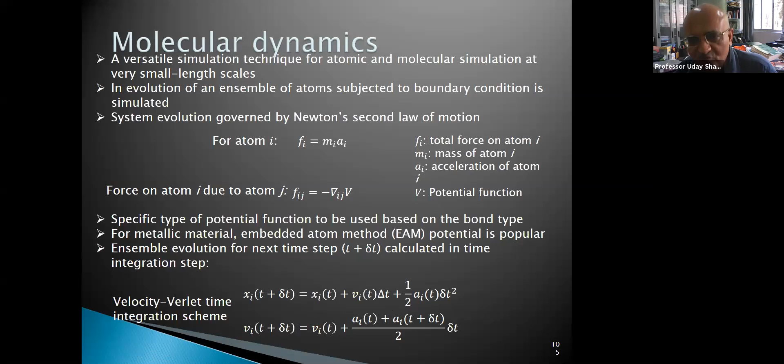Now here there is a point that integration schemes are quite reasonable and well established, but which potential function should be used is still a debate. On the other hand, in crystal plasticity FEM, you make certain assumptions and study the behavior of the crystal. So you don't go that deep.

Molecular dynamics is something in between. You can say something like meso scale, we are having micro, then meso, and then we go to macro size, and then we have large scale, looking at how the deformation is taking place.

I will not go into this, that we assume there is a resolved shear stress on some directions and all those, and there is a hardening law.

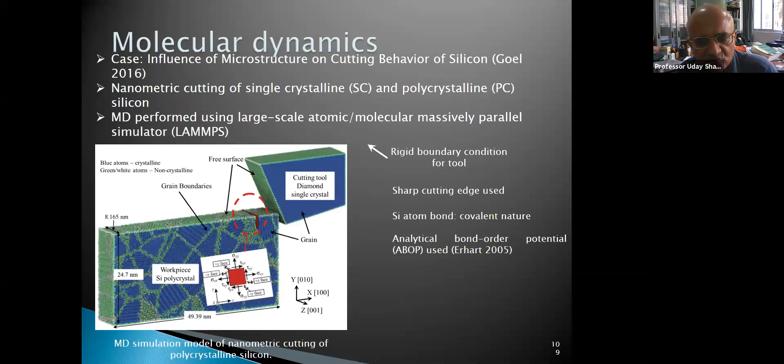But then we just show some case studies, suppose you have a cutting tool of diamond, and you are cutting silicon, giving very less deformation, doing nanometric cutting basically, and then you do it by molecular dynamics and by crystal plasticity both, and observe that.

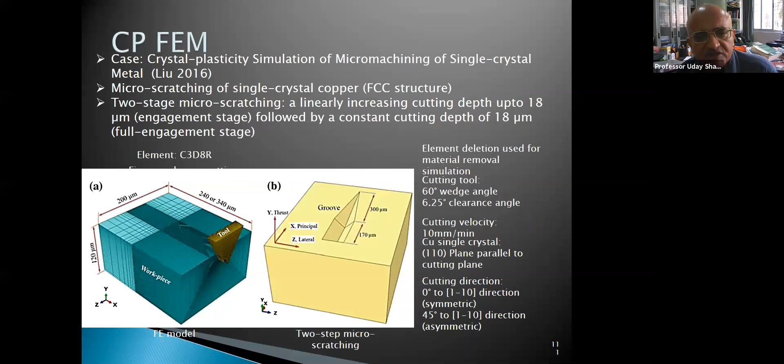So for a single crystal, if you do crystal plasticity FEM, the crystal plasticity model can be incorporated in finite element method, and molecular dynamics method will be separate, and CPM can be combined with FEM. So you get a lot of these results.

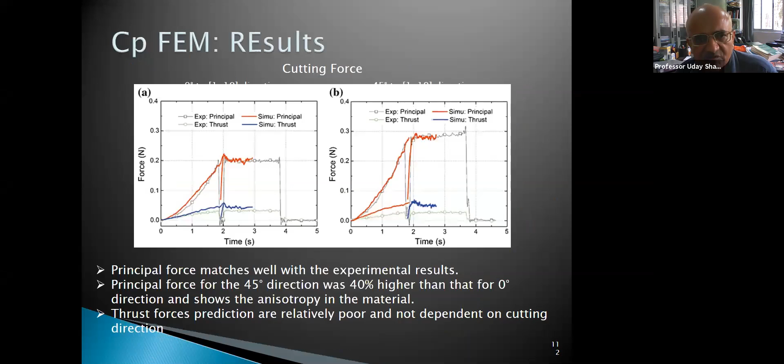And then you can get the chip morphology, all that type of detail you can get. You can study the behavior.

But you don't try to find out, suppose, what is the total force etc. If you try to model this way, then it will take a lot of computational time. So it is justified only where there is nanometric cutting, where traditional theories are failing.

This is a brief comparison, just putting it in this last slide, and after that I can show you some simulations a little bit.

Molecular dynamics is useful when the underlying deformation mechanism is not well understood. I don't know the behavior, so I go to molecular dynamics to check whether Tresca criteria is valid or Rankine theory is valid, I can do that.

It gives fundamental insight into the deformation processes, no prior knowledge of system evolution is required, but there's increased complexity of the potential and computational cost for multi-component systems. If you have a multi-component system, a lot of cost, and time scale and domain size are very limited.

Nowadays, people are doing molecular dynamic simulation, but they are simulating 100 nanometers and for 1 nanosecond like that, with an unrealistic strain rate they have to take, 10 to the power 8 and something. If they do it very slowly, then they cannot observe it, it will take a huge amount of time.

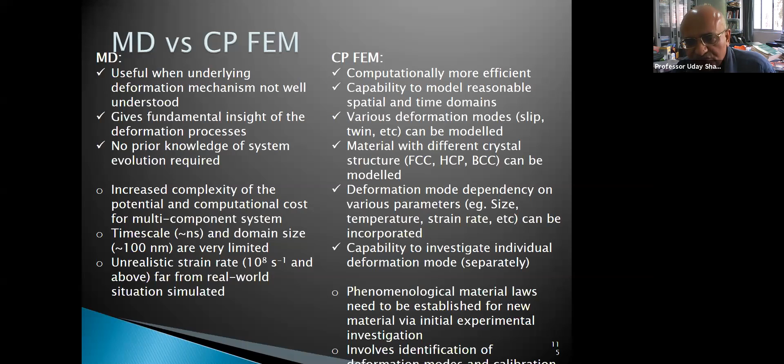Deformation mode dependency and various parameters, size effects, are incorporated, with the capability to investigate individual deformation modes, but it is basically a phenomenological material law method. That means you need a lot of material law which has to be based on empirical experiments. So it is basically using phenomenological models, and identification of deformation mode etc. is needed.

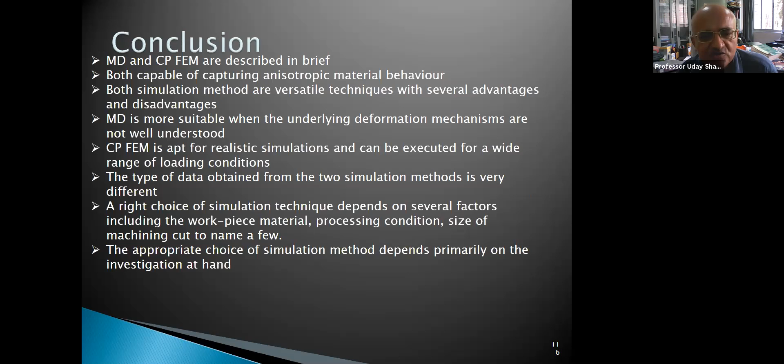So therefore, the point is that you have to make a judicious choice about where to use which process.

Okay, with this, let me show some simulations like this one, which generally take huge computational effort.

Here I am showing friction stir spot welding. Notice the mesh distortion and how this process is taking place as it moves, and you can see the material flowing so there is no pinhole left behind. A pinhole will only appear if simulated differently, and when made into a video file of this size, it is actually about 4 MB.

This is again friction stir welding, showing some phenomena. This simulation is giving some results, and then after that, let me move on.

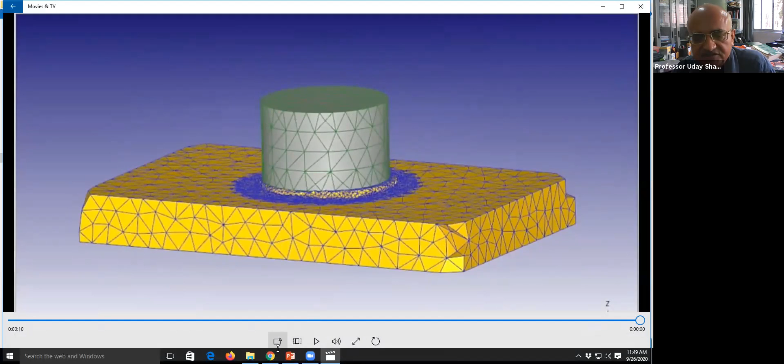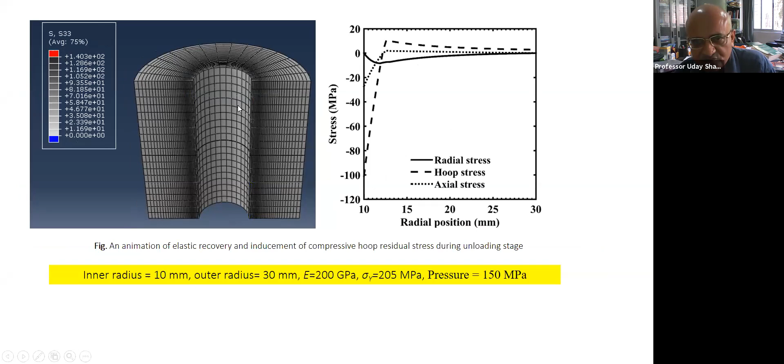Okay, let's go to the autofrettage process. This also simulates physics: you apply pressure and it produces stresses. You can see the stresses and get a lot of information. Then finally you get residual stresses, both compressive and tensile, shown here. This is showing hoop stresses, how they change during loading and unloading. That's how all these types of phenomena can be studied visually.

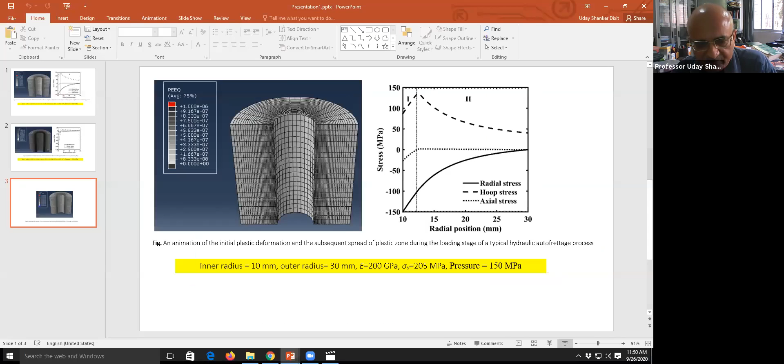So now let's go to laser bending. Okay, I have to change this, open with VLC media player. Okay, yeah, so it's like that.

See, scanning is taking place, the laser beam is going, temperature is rising, and simultaneously it is bending. We understood how the bending behavior takes place. Someone in a seminar thought that heating this way would bend one side while the other side would not, because he wasn't paying attention to continuum. But such demonstrations show that even when heating here, the whole sheet gets bent, with of course some distortion also.

So all these final details can come out, and we have compared it with this one also. Now let me just open this one. Open with, yes, VLC media player. Okay, yes, now here, yes.

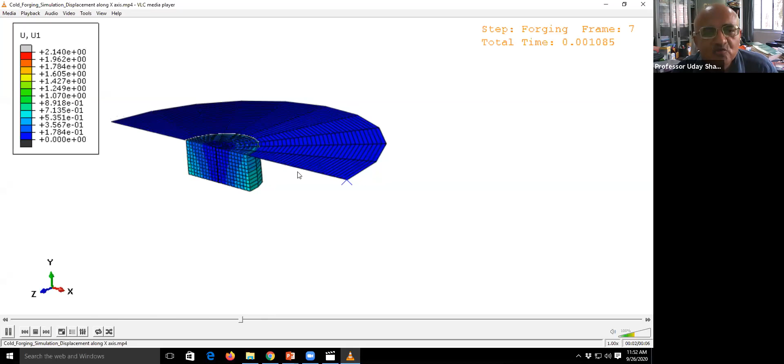Yes, this is actually a forging problem. We are compressing. Now you see, although I should have shown a punch, if I make a punch type of thing and mesh it, it will naturally take a lot of computational time. So I made it like a shell on top, that tool is like a shell, but it is rigid, and then it gives displacement. If you want to make it visually very attractive, then the other part has to be done outside the FEM packages, and then of course you can show that there is a tool and something like that.

Of course there are challenges associated with this, but we can make use of all the techniques in a very judicious way, depending on the context, and produce very good results, achieving the task of digital manufacturing. We can even make digital twins of our machines, which can be very useful, and it will be a big contribution to Industry 4.0 from the simulation community.